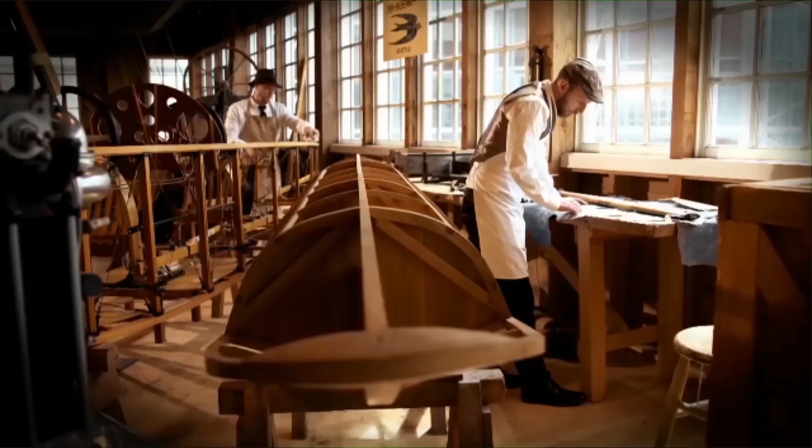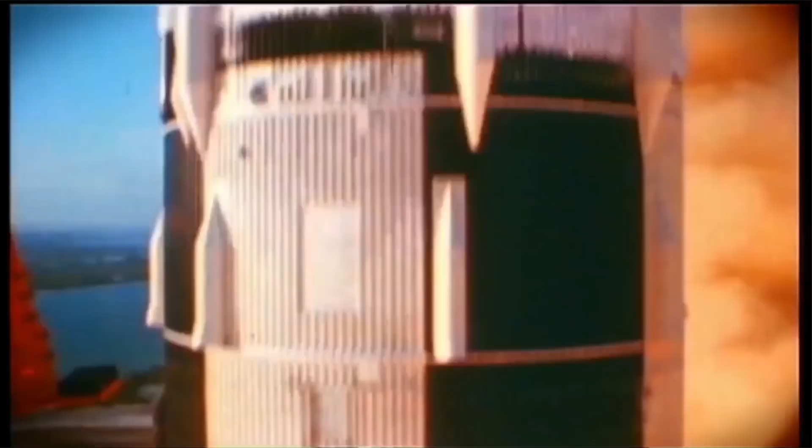There is a question as old as time, heard round the world and in every heart. It thrills the imagination and gives wings to possibility. Its footsteps fill history, and its hands hold destiny. It whispers in the dark, and its echo shakes the earth. The question called to those who came before, and they answered with the incredible. It urged them to start small and think infinite, to pursue possibilities and dream no small dream, to see a future filled with hope and unite to build something better. Working together, they connected continents. Building the future of flight, they unlocked the stars. Leading their generation, they inspired ours. To dream high and fly far, to bind together and build the future, to lead our world and find new ones, to honor their legacy and leave our own. Our founders heard the call, and their answer lives on. From ocean waves to the edge of space, through our first century and into the next, their memory remains. Now, it's our turn. The question is calling louder than ever. What will we dream next?

So I know it's after lunch, and it's in a dark room, and I've been in your seat before, so I want to get some interaction going. Let me ask a question. How many of you flew here to Boston? Just maybe take this opportunity to stretch. And how many of you flew on a Boeing airplane? Lots of hands. How many of you weren't paying attention to what airplane you're on? You just worried about what seat you were going to be sitting in?

That's not uncommon. If you think about what air travel has become today, we take it for granted. I love the video that started this with looking forward 100 years. So let's think about going back 100 years. What if you had to go back in time and explain to someone what air travel would be like in 2018? Looking back in 1918, the Sopwith Camel biplane was the in-airplane. So what would that be like?

You would say, well, in the future, you'll get into this big metal tube, and you'll hurl down a long and wide road up to 150 miles an hour, and then you'll lift off and go 7 miles up in the sky. You'll accelerate to more than 500 miles an hour, and the outside air temperature will be 50 below zero, and life is impossible. That's what we do. But you'll sit inside in comfort and enjoy a drink and some snacks, and a few hours later, you can touch down on the other end of the country. It's truly remarkable what air travel has become, and we all take it for granted.

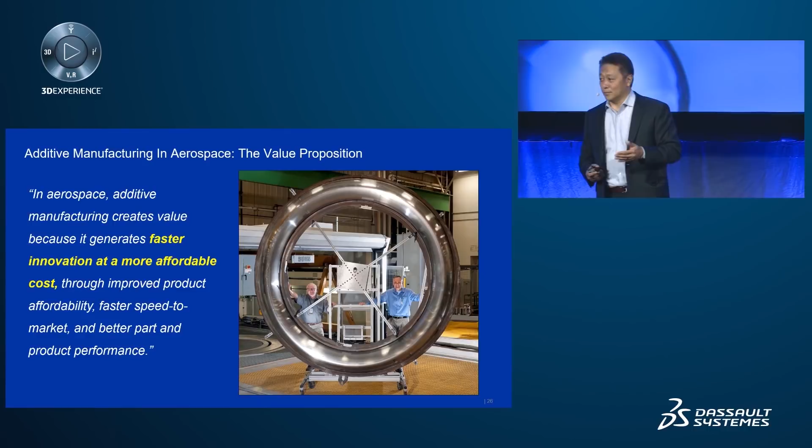But let's talk about what we're really here for. In aerospace and additive manufacturing, I think we're making a transition that is moving from what was prototyping and a lot of medical device industry to aerospace, where it becomes a value proposition. As we move forward, we're finding that it's generating faster innovation at a more affordable cost. Printing has its challenges, but it is showing us better product affordability and improved performance. And in the aerospace industry, performance is very, very important to us.

So when we look at additive manufacturing today, it's really the next leap in technology, but it's very similar to the products we have. We're now just talking about, instead of loggers and miners and metal forgers, now we're talking about spheroidizers and people who will make the powders that will produce the parts that we hope to make in the future.

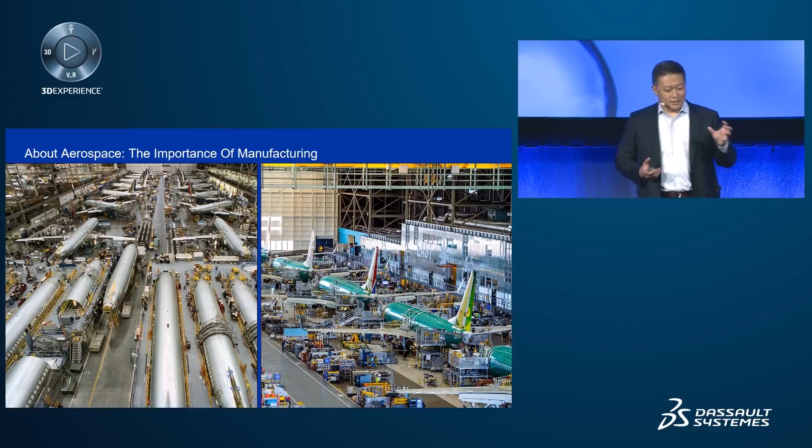The photo here on the left is our 737 factory of about a decade ago. You can see it looks very busy, it's got many bottlenecks in it. As that production system started to advance and try to go faster, we just continued to find more and more challenges. On the right is a photo of today's factory in Renton. This moving line is one of multiple identical moving lines that are producing 47 airplanes a month today, going to 52 later this year, and 57 airplanes a month next year.

That speed and velocity is tremendous for us. We've never gone faster in any production line, and additive manufacturing is one of the keys that we're using to help deliver that production system.

On the left, a manufacturing technician on the floor, if she needed some tool to help her build the airplane easier, would go to a tool design engineer, and then that tool design engineer might come up with something new and send it out to one of our suppliers, and maybe 1 or 2 or 3 months later, a tool would show up that would help to build the airplane better. At today's production rates, more than 100 airplanes could go by before one of these parts could show up.

So today we are deploying additive manufacturing down to the factory floor. We have engineers, tool designers, and 3D printers located on the shop floor, and it is enabling us to take sketches and turn those into tools and parts that help to build the airplane maybe the next day. This kind of technology is one of the keys that are helping us move forward.

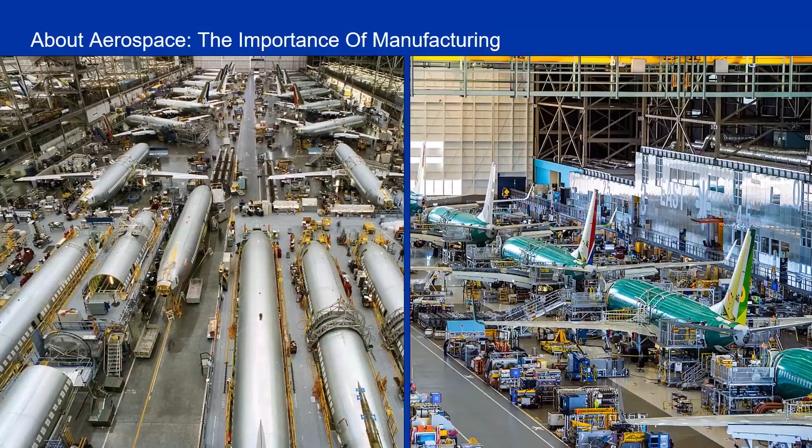As of now, we're delivering them on all of our 787s. This part is made with an additive process where the wire bead of titanium is put down just where it's needed, and it's something we call a buy-to-fly improvement. Traditionally, this part would be made with a block of titanium, which is very difficult to machine and very expensive. With this process, we're able to put just the right amount of material in the right places, and significantly reduce the amount of machining required to produce the part.

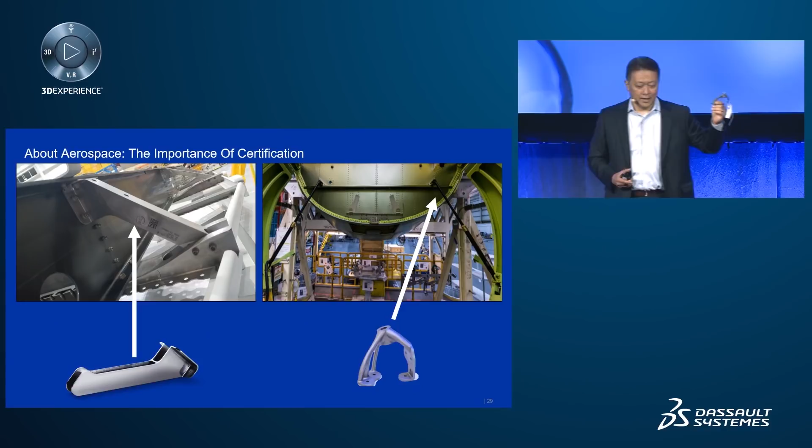This was built using titanium powder bed technology, and it has just recently flown on the Eco Demonstrator program at Boeing. It was a partnership between Boeing and Federal Express, and we flew this on a 777 freighter for several months, along with about 30 other new advanced technologies. This part is one of our first that we're trying to additively produce using titanium powder bed technologies and move that towards production.

Boeing is not new to additive manufacturing. In fact, we have been in the business for roughly 20 or more years, and we started with things like stereolithography. The very first 3D printing, when I first started at the company, I remember having these yellow models that were basically polymers that had been 3D printed, and they were very expensive.

As we've seen over time now, my kids are using their desktop printers in their classrooms. Engineers all over the company are now coming into the workforce with 3D printer experience. But the proliferation of that technology, I think, is still in its infancy. We are really just starting to see how the technology is taking off. But at Boeing, we have been doing this for a while.

It's been more than 15 years since we put the first 3D printed part onto one of our aircraft. We have a number of parts flying today, both in commercial and military aircraft. More than 60,000 parts are currently flying. Many of those are polymers. What we're seeing today is an advancement of new metals technologies, and that, I think, is where a lot of this industry is headed.

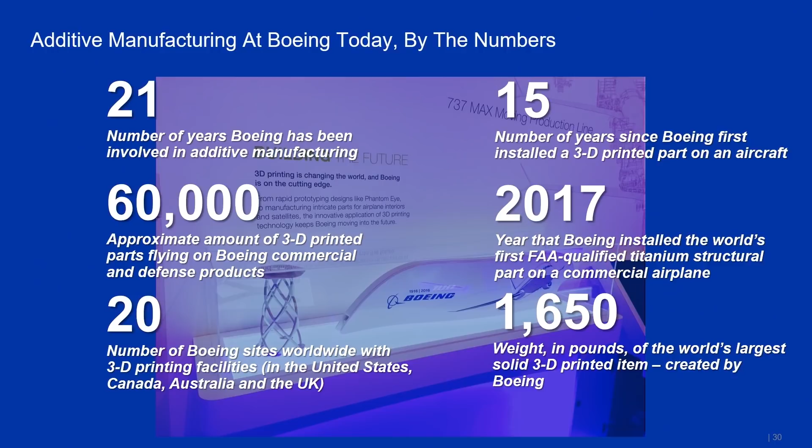We also created the largest solid 3D printed item, and I'll show you a video just here in a moment, together with our partners at Oak Ridge National Labs. So maybe we'll go to that, and let's see if we can get this to play.

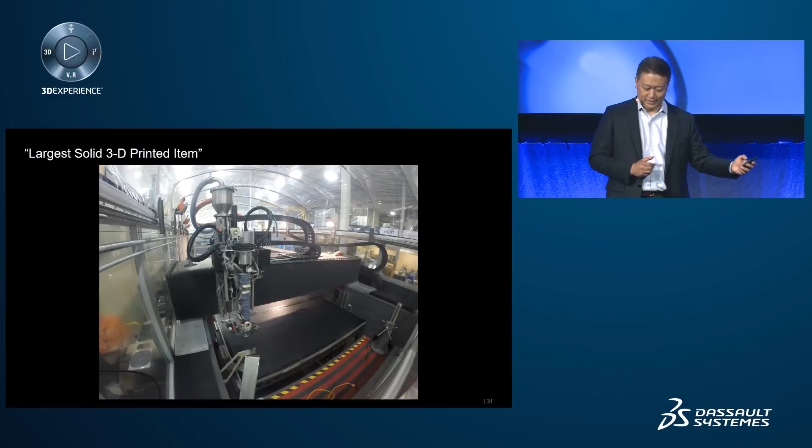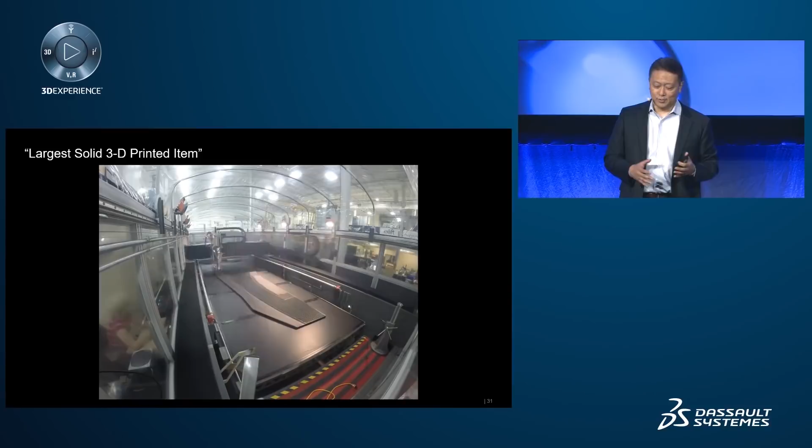So it doesn't have any sound, but this is a large area polymer printer at Oak Ridge National Labs that Boeing partnered with to fabricate a tool for development of the 777X program. At one point, this was the world record holder as the largest 3D printed item. It was over 1,600 pounds, and I'm told it took more than 30 hours to print.

It's a little long, but you can kind of see 30 hours sped up over a few seconds. So maybe we'll watch this just for a moment. You might be able to pick out what kind of part it was, what kind of tool it was for, by the shape of what's happening in the middle of that printer there.

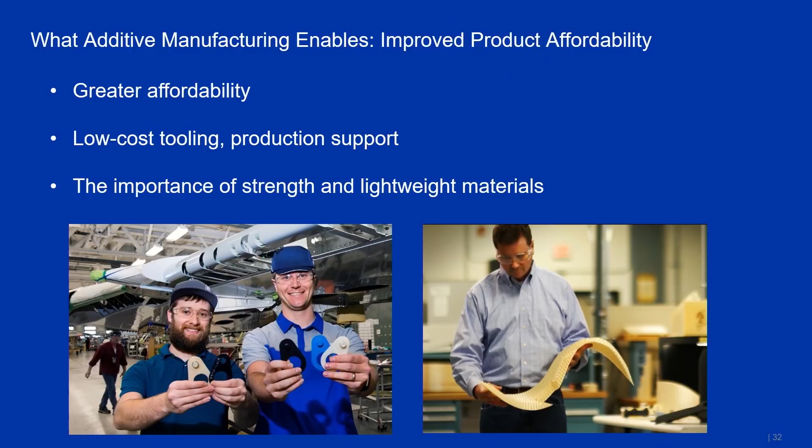All right, let's move on. So one of the things that additive is giving to us is greater affordability. Low-cost tooling and production is one of those key areas that we're finding great value in. In fact, some of the tools we produced have saved as much as 80% over their original traditionally manufactured costs, and the speed at which we're able to do this is significantly faster.

Those two gentlemen on the left are holding up some very small printed tools that assist the assembly of the 737. These innovation cells on our factory floors came up and asked for help to assemble the wing, because downstream in the production system, if parts weren't accurately aligned, we'd have quality issues and have to rework the airplanes before delivery. So they came up with a simple solution of small plastic parts that help align the bolts assembling the wing, and they were able to get these printed.

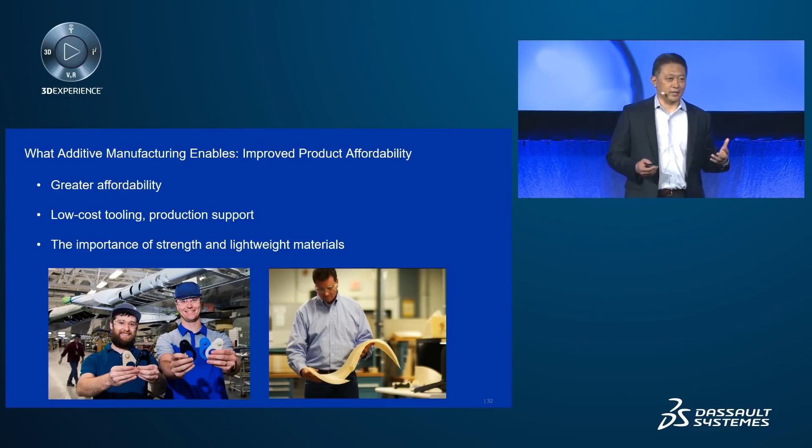Now every airplane going down the line is coming out perfectly. On the right is a flexible 3D printed honeycomb structure. If you're familiar with honeycomb core used in a lot of interior components on the airplane, it's a very stiff material and not very flexible. It creates a lot of challenges with production, so new 3D printed technology is being applied to have flexible tooling or flexible cores that will allow us to build the airplane easier. They also are reducing the weight of the products through various technologies.

We're also finding there is faster speed to market as we move forward. Being able to produce tools like in that video, what used to be a flow of 3 to 4 months to acquire a tool - to acquire large tools took many months to produce - now, as you heard, that part was printed in just 30 hours. So we can significantly reduce the time to market. It also allows us to look at more customization, taking things like interior components on the airplane and customizing those for individual customers.

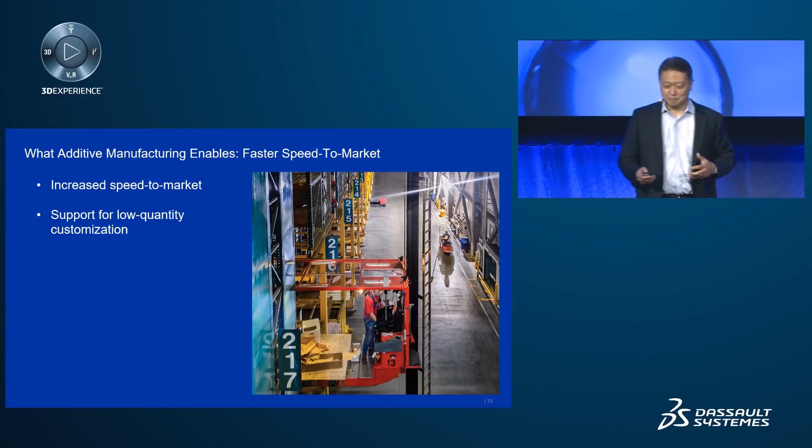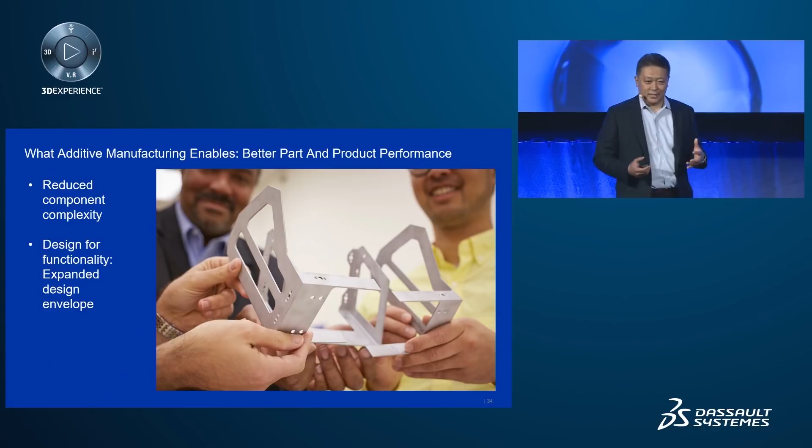Additive does have many challenges. Some of those are part size limitations - the printers for metal parts today do not have a very large build area. The part materials are very expensive as well, so before you're able to print, you need to make sure you've got the right design.

The role of our regulators is key in the aerospace industry, and how we partner with our regulatory agencies is going to be really important going forward as we work to implement these new technologies, keeping them aligned and partnered with us so that we can certify the parts and get them approved and onto the airplanes, because the most important thing to us is safety.

Nothing is more important than safety. If you think of that story I told at the beginning about trying to explain flying in a 737, flying is safer than driving to work. It would be safer than riding on a horse 100 years ago. So we don't want to do anything that would mess that up.

We also are challenged by talent, and being able to attract, maintain, train and retain those engineers in an environment where additive manufacturing seems to be taking off everywhere. So we are partnered with some universities and other industries to help us train our engineers. In fact, Dassault Systèmes has been very helpful in training our engineers with the 3DEXPERIENCE platform.

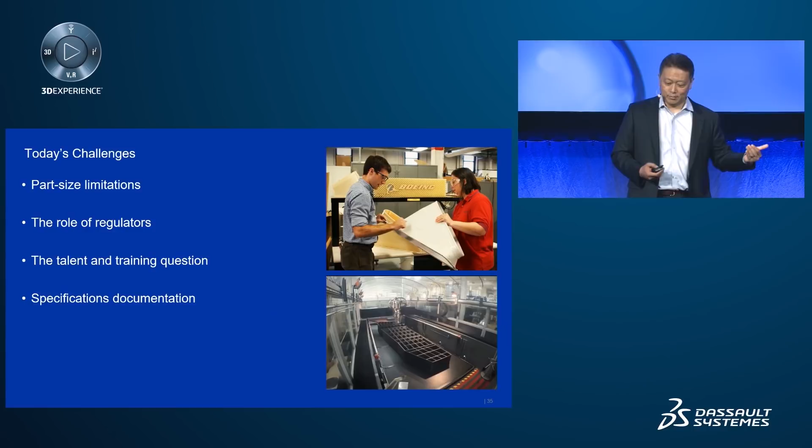Finally, there are specification documents that are very important for production of parts, and that's an area where it's a very big challenge today to have process specifications and material specifications that are consistent when we have many new industry entrants into the additive space. They come with new machines, new technologies, new material systems, and none of these are consistent across the board. Managing that and being able to control them in an environment that allows us to produce parts we can put on the airplane is another challenge for us.

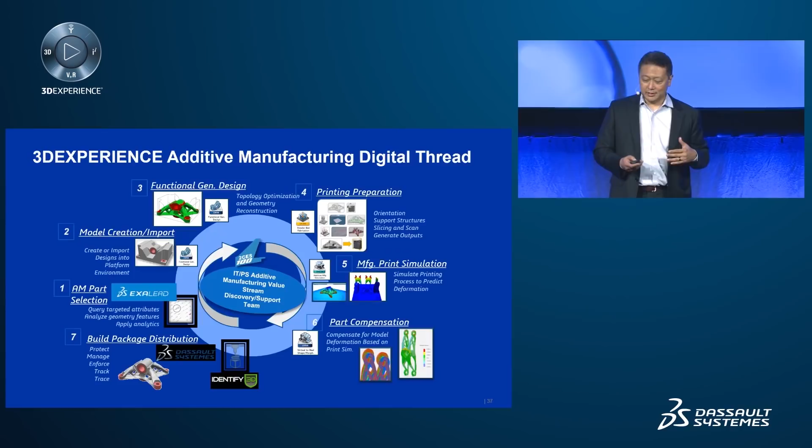Fortunate for us, with our partnership with Dassault Systèmes, last year after an exhaustive evaluation, Boeing chose to adopt the 3DEXPERIENCE platform as part of our digital transformation. My team, most recently, has had the opportunity to use the additive manufacturing platform.

This is a little busy chart, but I'll try to walk our way around it. You saw a little bit of this in Bruno's presentation. So we'll start at number 1, where we are able to use an analytics tool to look at the geometry of the parts on our airplane, the millions and millions of parts on our aircraft, and start to evaluate them based on geometric features for candidates for additive manufacturing.

And then as we create those models, we're able to really functionally generate the additive space, the design. We're able to, just like that part I showed you, this uses a topology optimizer, and it really looks much more different than any traditionally machined part, and it cannot be made by a normal machine process.

This type of design, using a topology optimization, in the case of this part, reduced the weight by about 30%, and we cut the number of fasteners in the design it takes to assemble it by more than half. So we're able to take that technology, apply it to the design, and then also start preparing for printing.

As I mentioned, printing materials are very expensive today, so you don't want to fill your printer with your expensive powder only to find out that the print has failed or that it has warped. By being able to prepare the models and then go through the manufacturing simulation, and also compensate for the design as you go through that simulation, that integrated solution has been a tremendous help to Boeing.

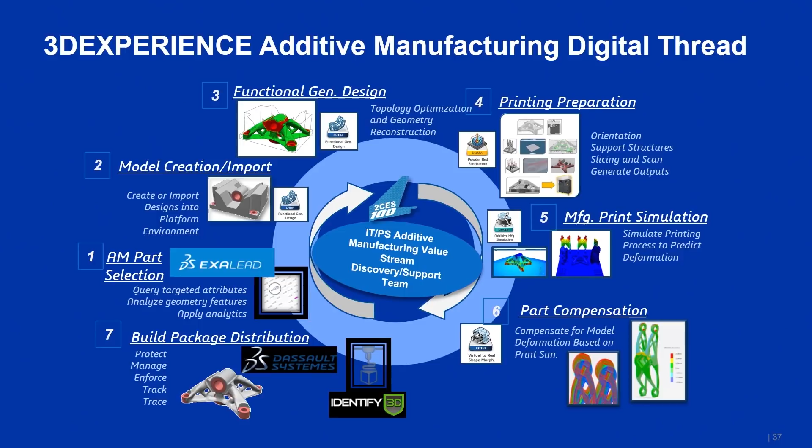I think step 7, where we will be able to distribute this - one day we envision maybe an airline with a printer, and they need a spare part, they swipe their credit card and they print out the part. That future is possible today. I think we just have a little bit more work to do from a certification standpoint. But through the software system, we'll be able to do that.

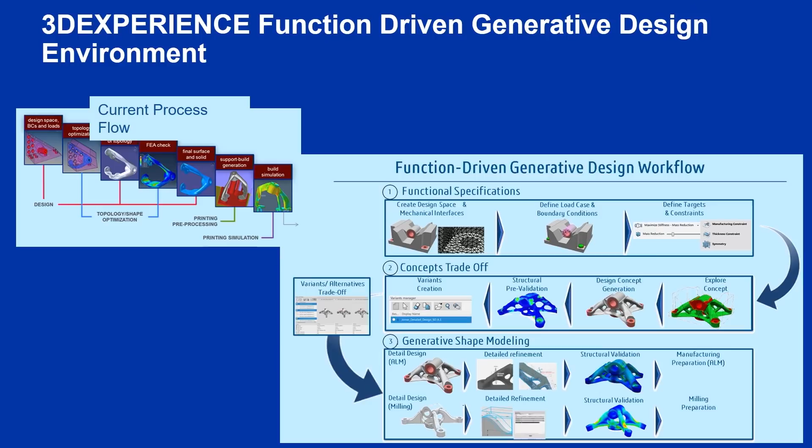This chart displays the experience that our team has had. The current process is what was used to design this part. It requires a lot of import and export of files to different software packages. This is kind of an industry standard today, using different software packages for topology optimization, for finite element modeling, and for the build package requirements to design support structure and other things. And each of those translations is prone to errors and prone to translation differences.

What we found with the 3DEXPERIENCE platform is that this has been integrated. That tool now has combined all of these different functionalities into a single package with native CATIA geometry, and we're able to translate those models into the finite element system, into the build files, and the analysis of the build files to compensate for the models.

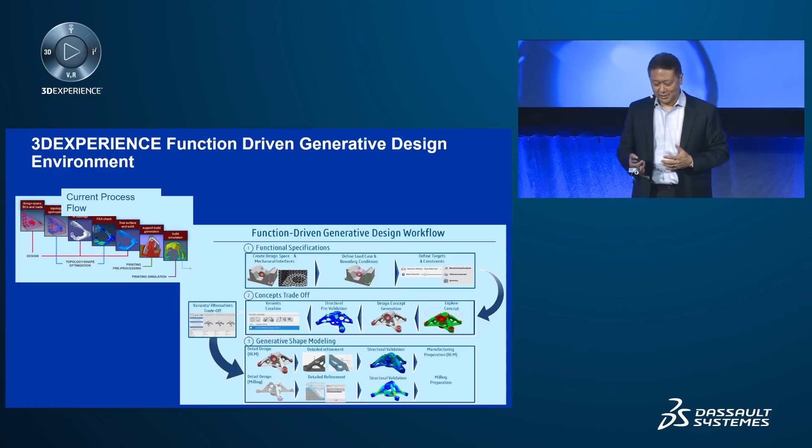All of this activity that we were seeing take weeks to months in some of the original designs, the teams are now being able to do in days what was taking us weeks in the past. So we're seeing a huge benefit from the software and the ability to do that. And we've now got several dozen of our engineers trained in this package and applying it to our new designs.

So I'll end with this slide. And it's really about what do we think will happen in the future? Where are we going to go?

The slide there on the right is a 3D printed inkjet panel for the ceiling of a commercial aircraft. It is customized to an airline using inkjet technology and 3D printing capabilities. So it's just a glimpse into where we might be able to go in the future, integrating different solutions for our customers to provide new customization, new lighter, and integrated structures that we can't do today.

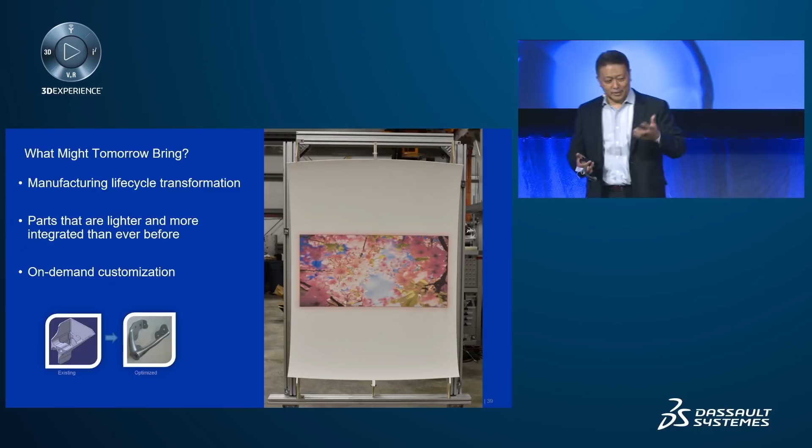But I think the biggest value of additive manufacturing is going to come from engineers using the tools available to them to design something that just cannot be produced today. These are parts that will not be made with a traditional manufacturing method. These are the kind of parts we will design in the future that will truly transform aerospace and engineering. So I'm going to leave you with the question from the video, which is: what will we dream next? Thank you.